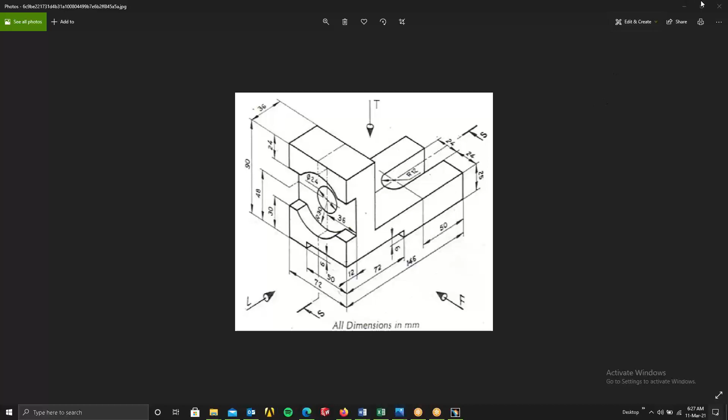Okay, then you can pocket that hole too. Then what else? That's it. Yeah, it is almost done. So it's a good observation. Yeah, you can remove it.

Just minimize the screen so we can straight away take our side plane, sketch, and here we'll do this. So for this, what are the things which are required? We'll first take our center point rectangle and put this rectangle here. Randomly just put it, double click on the dimensions. What is the total height of this? 90 mm.

What is the total width of this? They have given 145 mm. Okay, then what else? I'll take my profile command. I'll just randomly sketch a line like this, and make sure it's vertical, and make sure it is horizontal, so that I don't have to apply any other constraints.

I'll just close this. I'll apply my other constraints. This to this is 25. Enter. Control Z. Here, this first we'll do. This is okay. Height - now this to this...

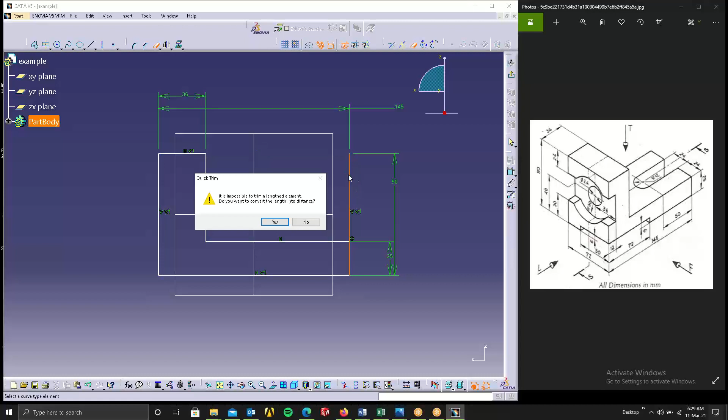Get rid of this. Yes. So the problem is we selected the endpoint, so we'll just do a correction. Delete this, delete this dimension. Select this and select the sides like we first discussed. Select this and select this. Okay, that is done. Then if you want to simplify it even further, we can just use this thing.

Here is the depth - they have 12. So here what I can do is, I can take this, I can just randomly draw a straight line. I'll simplify it as much as possible. Get rid of this. Double click on dimensions. From here to here it is 24. From here to here they have given it as 30.

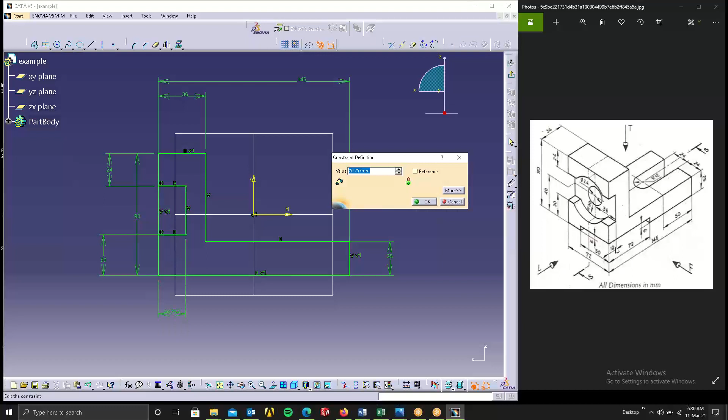Enter. And here this distance they have given us 12, over here 12. Okay, and here this thing you can remove. Okay, what else?

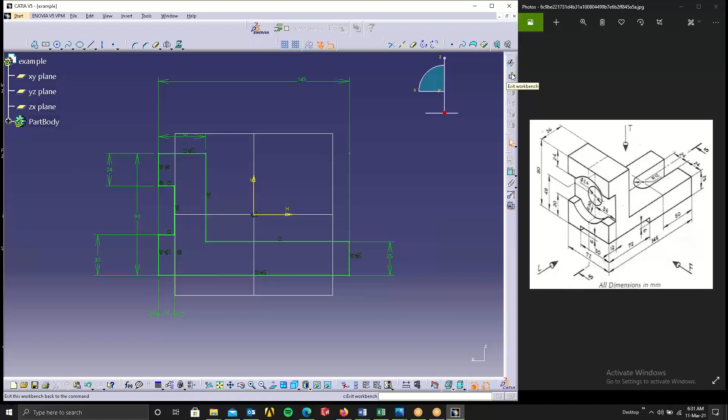So much they have given. Okay, next we'll check if we've missed out anything in this dimension-wise. No, okay, done. So we can just exit the sketch.

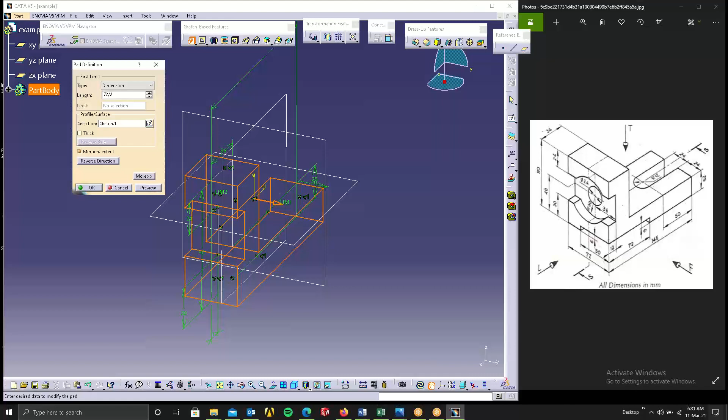Since it's in center, we can pad it, and I can use the mirror command, mirrored extent, so both sides will be exactly in the center position. Total width of this is 72, so I'll give 72 divided by 2, half of the distance, and I'll get this.

Then I'll select my front view, I'll sketch. I'll first create a circle, a random circle. There's one cutout here also, so I'll do that together. You need to minimize the number of steps used, so I'll just randomly create that also.

So double click on the thing for dimension. The diameter of this is given as 24. Enter. And there's one more circle there.

That one I'll put off right now. What is the diameter of that? Diameter of the outer circle is radius 30. Radius 30, you can give here.

Then what else is there? That's all right. So this is at a height of 48. This is at a height of 40. Just check this.

Since it's in center, 45. The height of 45. So this thing they asked is 48.

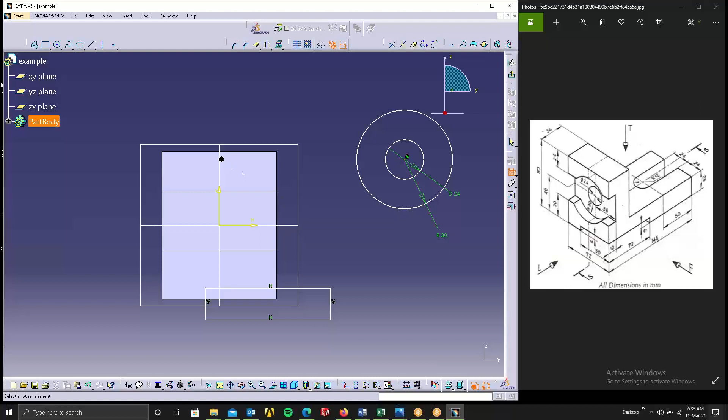Radius 30, this is diameter 24. Enter. So radius 30, diameter 24. Select this and select the center line axis, right click, coincidence. Now select this to the bottom right, bottom. How to get 48. Enter, so that is done.

Then coming to this one, the height is 6, so you can go here and give 6 mm. Enter. And here this distance is 50, so you can select this side wall, select this side wall, give 50, enter, like this. So this is done.

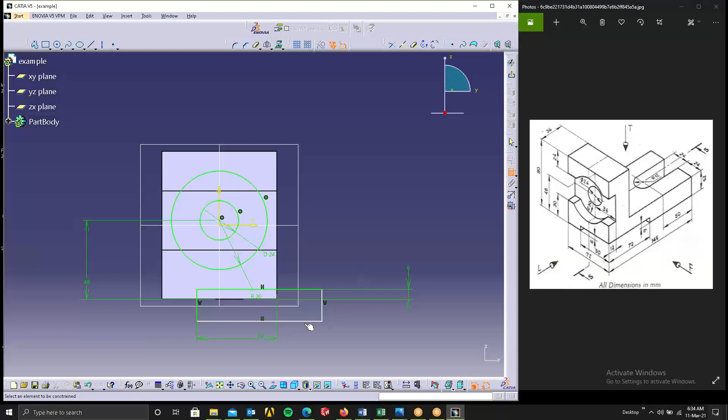This you can give any random value, doesn't matter. Okay, so now this is done. Now you can exit the sketch.

Now over here we can take our multi-pocket which we discussed yesterday. This one is throughout, no big deal. Now this next one is going to a depth of 12, so you can select 12 over here. Then this one is going to a depth of 72 here again, so you can give 72 here, and you can click OK.

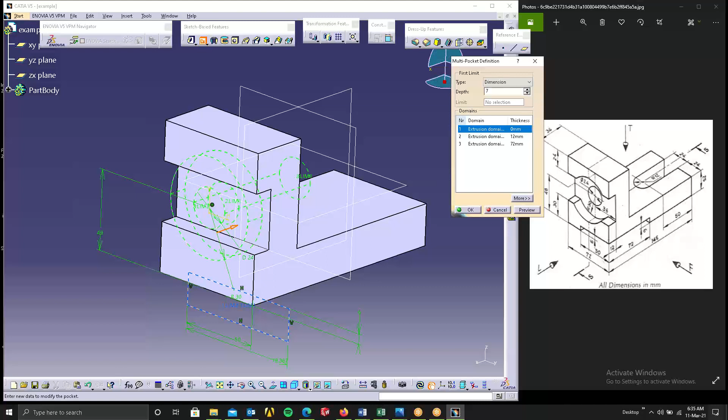So this front part is complete. Now all that remains is the top view. So for the top view, you can select this, you can sketch.

Here, see this thing is rotating in a direction which I don't want. See in this it's like this. Now I want this view like this so that I can draw it here, but when I'm selecting the sketch, it's rotating in the other way around. See, it's rotating in this way. So I don't want this. So how do I change the position of the sketch?

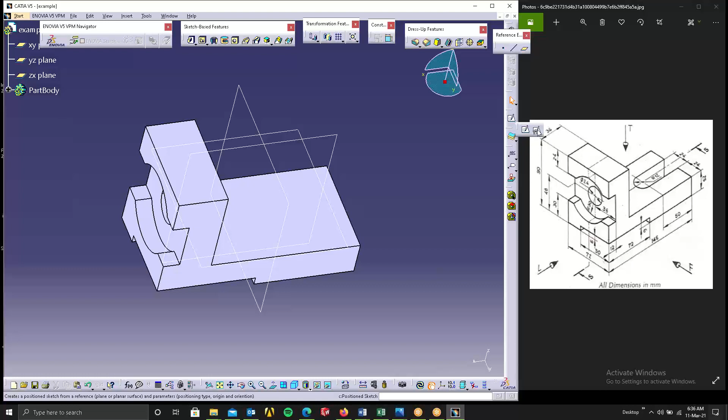For that we have a tool here, position sketch. Okay, position sketch. So I want it in the way I want it. I don't want it to put it here or there, I don't want to get confused. So I'll just select this, I'll select this top view.

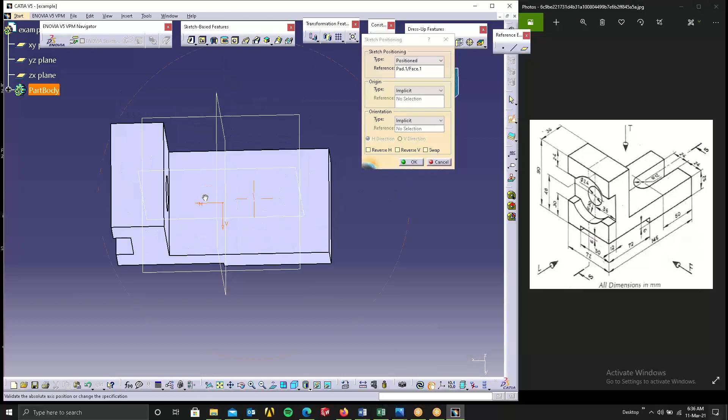Over here we can see vertical is here, horizontal is here. So every time we open the sketch, how is the symbol shown? Vertical and horizontal - vertical means it will be pointed at 90 degrees upwards, and horizontal will be towards the right side. But in this case it's the right opposite. So what we have to do is reverse H, H will come this side, reverse V, V will come here. So this is what we want, this is how it looks.

So I'll click OK. If I click OK, you can see I got it the way I wanted. I'll exit this, I'll show you again.

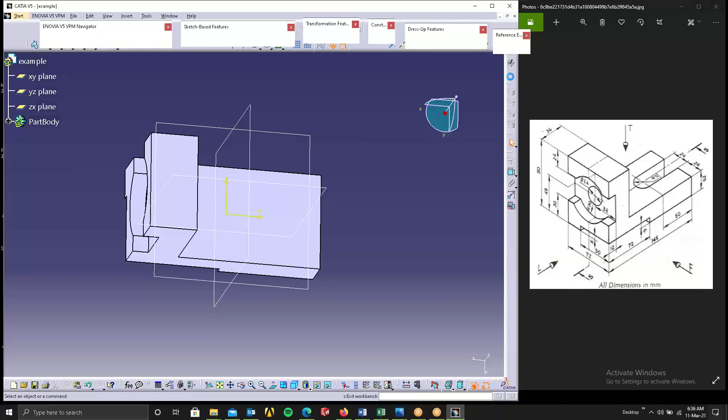So right now I'll take position sketch, I'll select this, I'll select the plane, I want this top plane. Here vertical is down, horizontal is up. I'll reverse H, reverse vertical, I'll click OK. So now I get it the way I want.

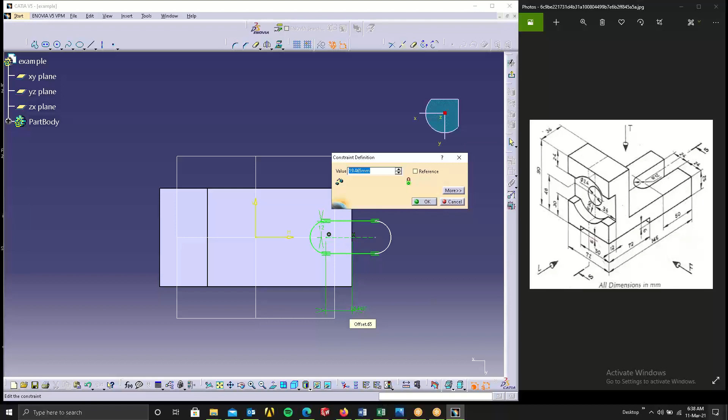Delete this. If you change that automatically, this will change. See, 24 — no need to give any of those dimensions. What else is there? This distance is mandatory. This point, radial point to this edge, is 60. This is important.

Then what else? Anything? Only so much. So you can exit the sketch. I can use normal pocket. You don't want anything else? So in normal pocket, it's already there. Click OK. So your job is done.

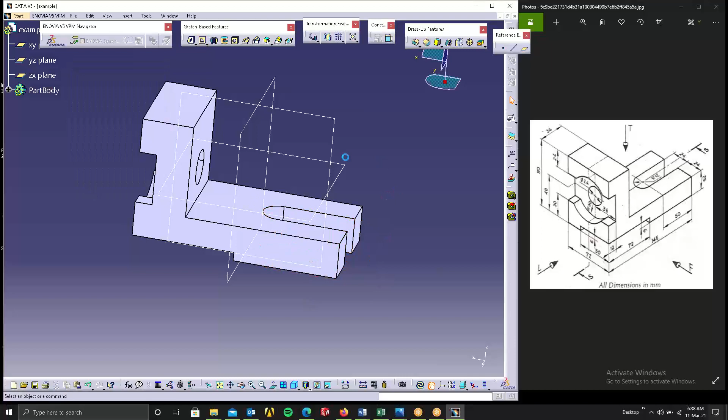Are we missing out anything? Let's check if you're missing out anything. Nope, okay. So it's not that difficult, right?

It looks really difficult, but it wasn't that difficult, right? Vignesh, do you find it difficult now? No, sir. After you explained, it's pretty clear.

So all these models, whatever you're going to do, it's all like this only. Just put some thought into it. What happens is our curiosity, anxiety, and everything kicks in the moment you see something like this. That will directly affect the way you think. So it'll be like, okay, I can't do this, and it'll just close the chapter there and then.

So better to just open up and start. See, you can do it. It's not a big deal. It's a small thing — even a small 10th standard kid can do it. Okay, keep that thought in your mind.

This is not the important thing. The important thing is your understanding about your mechanic industry, understanding about manufacturability, understanding about feasibility, understanding about what tools to use, how to do it, the final product, how it should be done. That is the main important thing in design.

Designing something like this is not a big thing. Anybody can do it. If you teach somebody, they can do it. So don't complicate things. Don't think if I'm good at design, I know everything — it's not at all true.

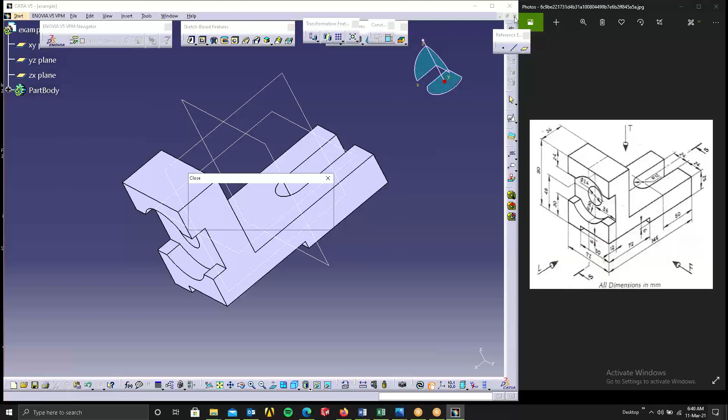We'll do one more example. I'll close this, I'll just open a new part design. I'll give an example. I'll do one more example. So you can study this, take a screenshot of this, and let me know once it's done.

Could you zoom in a little bit? Yeah, sure thing.

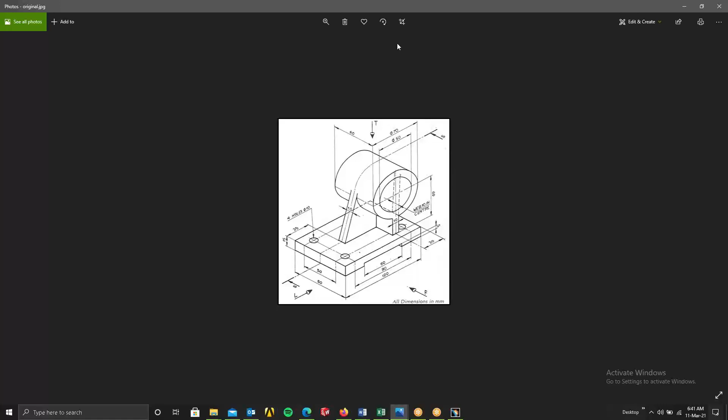If done. I'm done. Yeah, done sir. Done. Done. Yes, yes, yes, yeah. So just take your time, just study this. Tell me how you're going to do this.

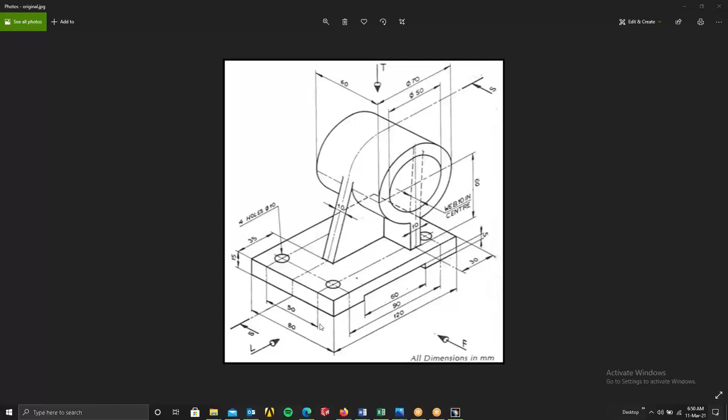So we'll just do this. Let me minimize this. We'll start with this example, starting with this plane. We'll take a normal sketch and do the concentric circle.

What is this? Okay, circle. That's an ellipse. So create a concentric circle, and create this small rectangle which is passing here.

Double click on this, I'll show you. I told you, you don't have to go to the constraints, you can do it here only. Select the two edges, right click, allow symmetry line, select the vertical line. So you can apply symmetry straight away without breaking your head.

The width of this is 10 mm. If you do this, just delete it, right click and delete. Don't press escape, because then you have to go here again. So, 10, enter.

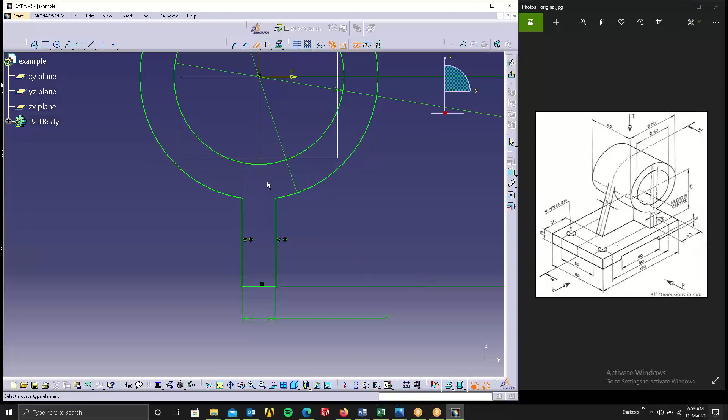Okay, now this is done. The problem with this is we'll touch this. If it's not touching, you could have straight away done this. What I'll do is, there's one more command, let's remove this. We have here isolate. This thing is the profile feature isolate, so what you can do is select these many elements and click OK, and this will become isolated. I shouldn't have taught you this now, but we'll just check.

Okay, this thing. Now again our dimensions, select this and select this, right click, allow symmetry line, select the vertical line. Dimension this, 120, enter. And what else do we have? This one is how much, what is the thickness? 15, enter.

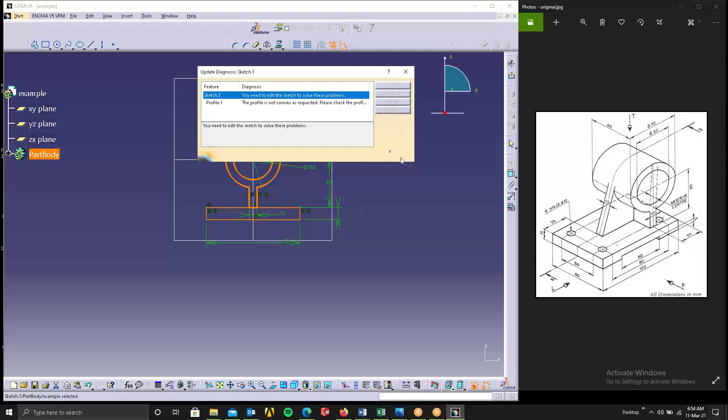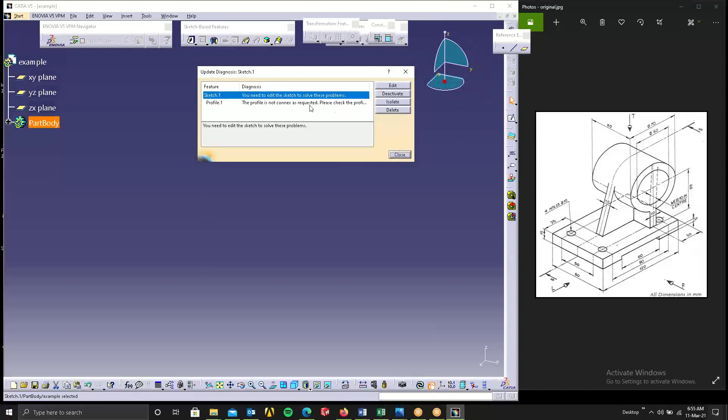15, we'll just check this once. Also, I doubt it, yeah, edit, close. Select this, select this, isolate, okay, but we're getting issues with that. Control Z, Control Z.

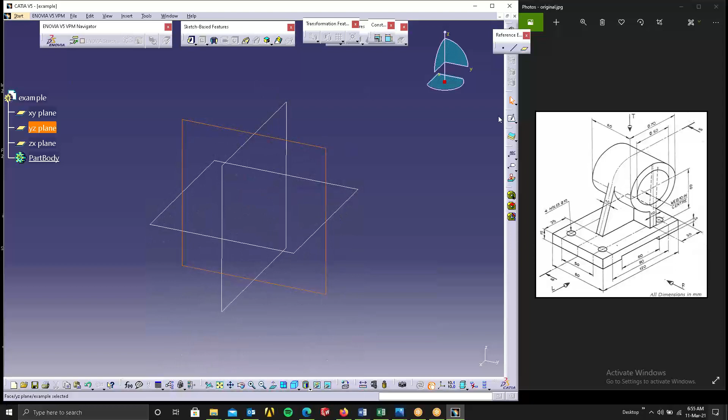We got some bug there, it's gone. So we'll just do it again. You should be very careful while using Catia, you don't want double work. That's why it's important to check before proceeding.

A lot of things like this will occur when you're doing simple models. So this is 70, enter. Now this is 50. And the other part, the small part, double click on dimensions.

This is 10, enter. Right click, allow symmetry line, select the symmetry line, and the height part. This base element is 60, enter. Double click on trim this, trim this, trim this, and trim this. So this is our part. Now you can just exit this.

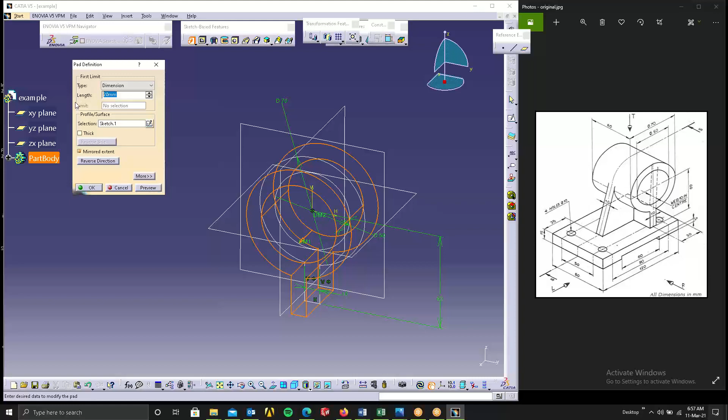Here we can pad it to a distance, take mirror command. We can pad it to a distance of how much? 60, so we can give 30. Enter. Okay, this is done. 30 is done. Now select this part.

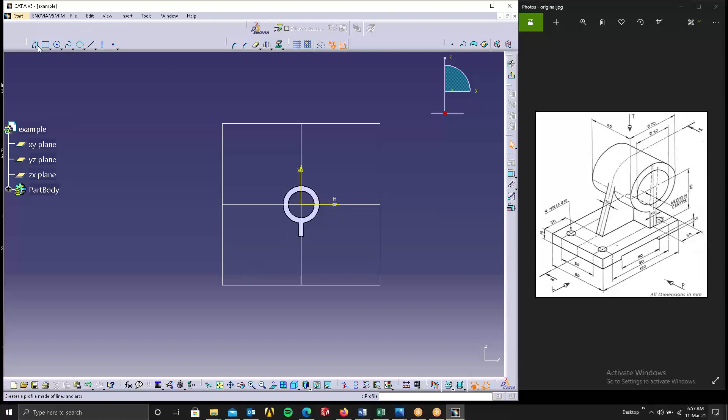We'll sketch here, we'll sketch this part. Will it pad from 60? I don't get where it is mentioned 60. See here it is given 60. Oh, okay.

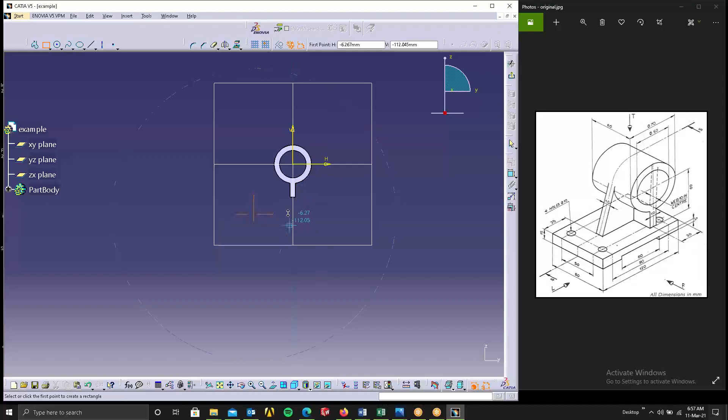Normal view, over here we can just do this. We select the zoom command. From this point just randomly create a rectangle. Here one more rectangle you create randomly, don't have to waste time on this.

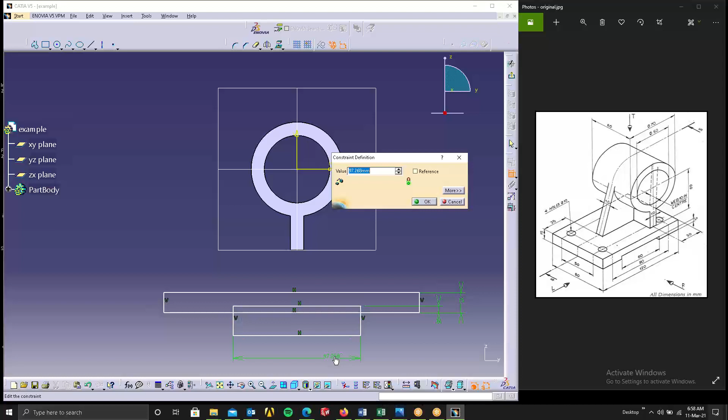Double click on dimensions. This one has a thickness of 15. This is at a distance of 5. Okay. Then what else you have? This at a distance of 60. Okay, 60.

This is right click, allow symmetry line. Select this, let's do symmetry. What else do we need? 120, 90, everything's done. Thickness is given. This width we haven't specified yet. Select the sides. Total length is 120. Enter.

Select this, select this, allow symmetry line. Select the center axis. Okay. Select this, select the base edge. Zoom in, select this base edge and apply constraint. Coincidence. Okay, just check this once.

What distance is given? Here it is given 30 from the center of the axis. So we can't give it since we applied symmetry. So that symmetry feature we have to get rid of. Come to this, go to sketch. Here we have constraints, so we have parallelism. Symmetry, get rid of symmetry. Just delete this from here and delete the symmetry from here. Okay, so I was showing you that, it's much more convenient.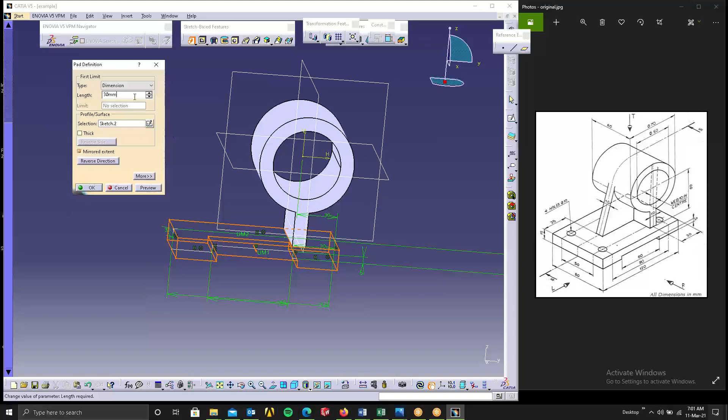You can just double click on trim, get rid of this, get rid of this, get rid of this, and get rid of this. So many things you get rid of. Exit the sketch. Now use pad command, turn on mirror option. Here they have given how much? 60, so here you give 30. Enter, so the base is done.

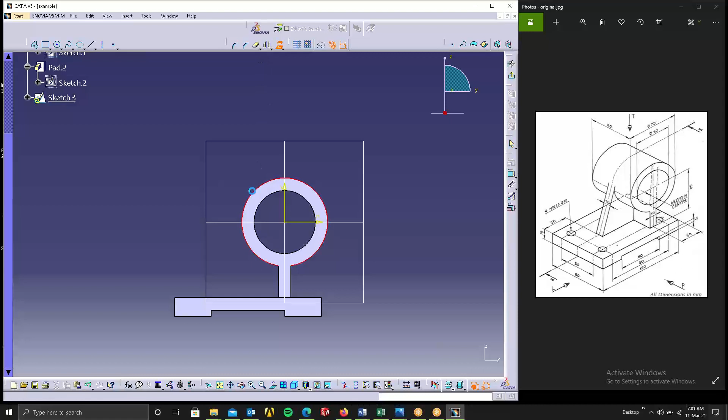So almost it's complete, so we can just select this plane, center plane again. Sketch on this, so here take project 3D. Select the circle, and then here we have this rib, it is at a distance of 35. So random axis, okay, random thing you create. Then select dimensions, the dimensions you do the rest. First thing is first.

First, yeah, tangency. Select these two elements, apply tangency over there. Then this thing is coincident to this. Coincidence, it's turned out double click, I hope it's double clicked. So select this, right click, coincidence. Select this and select this, and this. It's again gone, double click.

Select this and select this. Here how much we have? 35, 35, okay. Double click on trim. Before double clicking on this, project 3D element. This you select, project 3D element. This line also you select. Okay, then double click on trim.

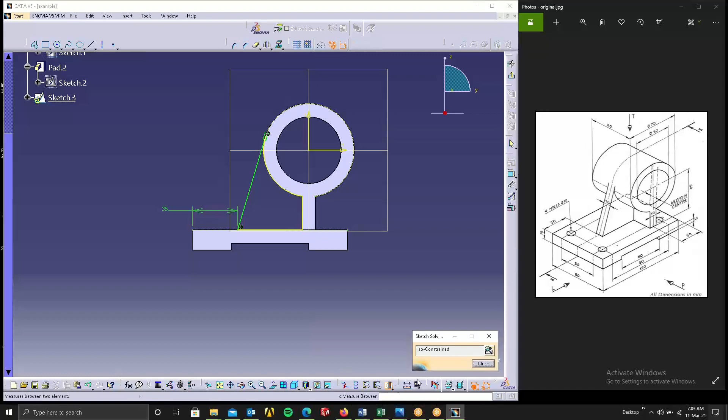Get rid of this, get rid of this, get rid of this, get rid of this. So everything you get rid of, almost anything that is covering this. We need this as a complete thing, complete connected lines. If there are any gaps anywhere, then we won't get it. So just check this, any gaps anywhere, just go to geometry. So everything is closed. Yeah, so no big deal.

So we'll get it, you can exit this and pad it to a distance of 10. Not 10, sorry, 5. Mirror 5, yeah, mirror command. So when you use mirror, just give the half value. Then select the top plane, sketch. Okay, just create the circles. We have one circle here. Oh, sorry.

And here we have one more circle. Double click on dimensions. The four holes are diameter 10, as given here. So this is diameter 10. Enter. This is also diameter 10. Enter. The center of these two are not coincident.

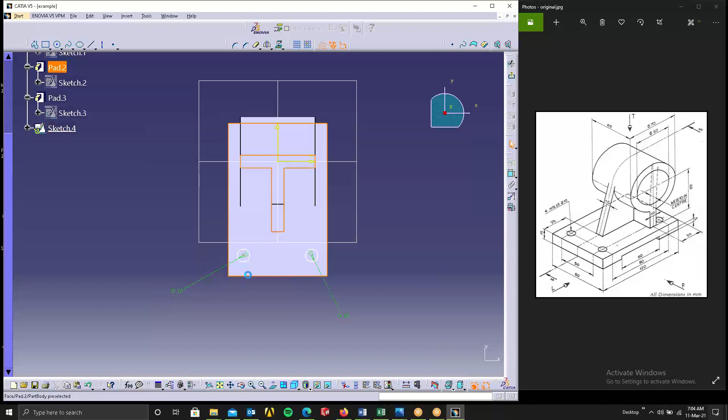Horizontal, I can't give this, so we will do something else. First, constrain this, we can do vertical. That is in SolidWorks, other software. In Catia, we have a problem with that. So we can just give them a vertical measure, no big deal. I was trying to do it using constraint.

Just normally do it. So double click on dimensions. This too, this is 120. Enter. 120, no, that's 90. 90. That's 90. Okay, so make this 90. Enter. Then what we will do is...

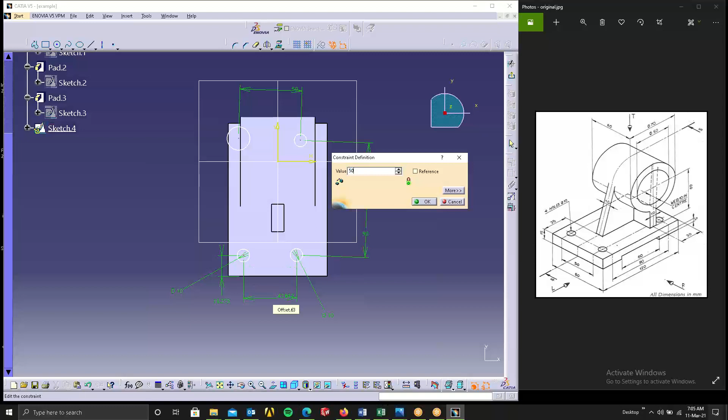Distance of this is 50. So these two are at a distance of 50. Give 50 here. Enter. Here also you give 50. Enter. Here you give again 90. Enter. So now this and this, right click, apply symmetry line.

Select the vertical axis. This and this, right click, apply symmetry line. Select the vertical axis, and then here, what else we have? This diameter, what is this diameter? 10. Enter. This diameter is also 10.

Enter. So what is blocking this? I think two measurements, just delete this. See, this is at an inclined angle, this is not what we want, this is a slope. Yeah, this is straight, that is slope. So every time you're giving dimensions, just make sure you select the distance and right click horizontal and vertical measurement, or else it will become a slope.

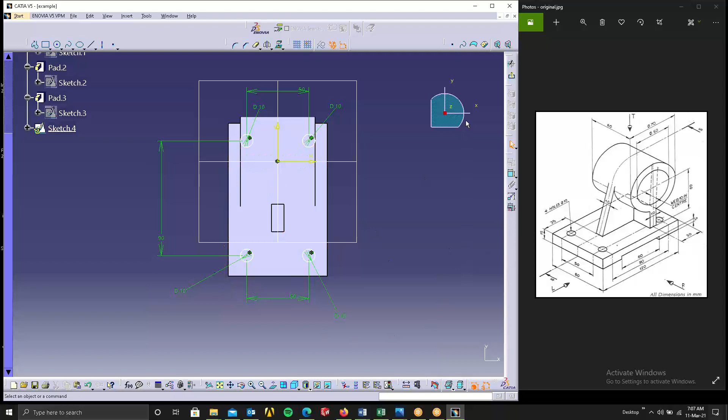So this is done, everything is done. Here some 16 something is there, just get rid of this. So all the dimensions are correct. So you can just exit the sketch. You can just pocket it. Take the limit, pull it down. Click OK. So anything missed out?

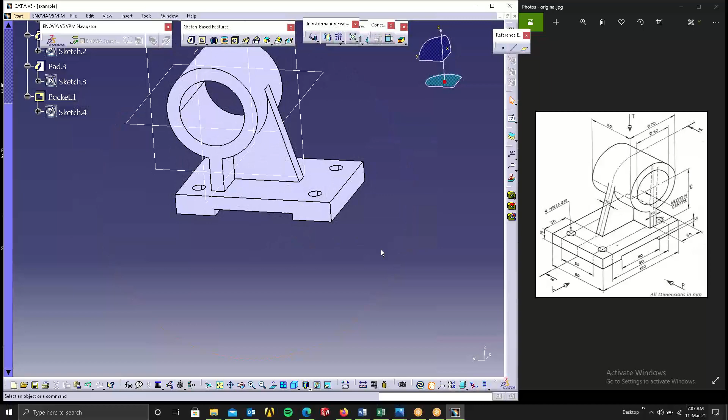I think we are good. So Vignesh, have you understood this? Yes sir, yes. Is it difficult?

See, the thing is, we could have done it in one shot itself. This one element, this one element, this one element, we could have done it in one shot. But since we have some bugs, using multi-pocket, we could have done that.

Okay, so you can see, one plane you select this center plane for this. Second, again this plane you select and create this. Sorry, first you create this, then you create this, then you create this. Only three steps, then the whole thing, four steps you could do this. Understood, right? Yes sir. So what else do we have?

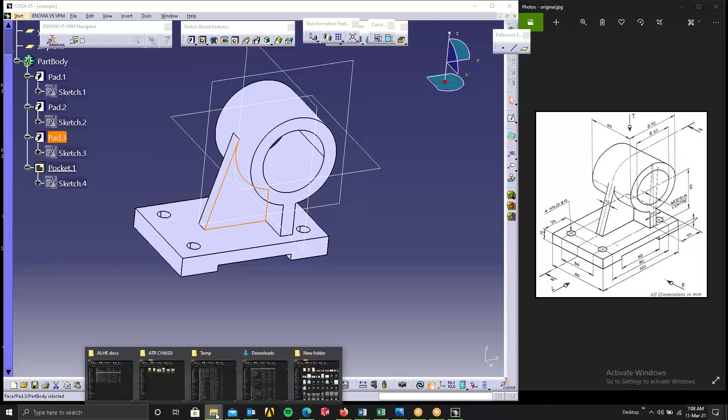Any other examples? This is rib and slot, you have to use. This is done. This same thing.

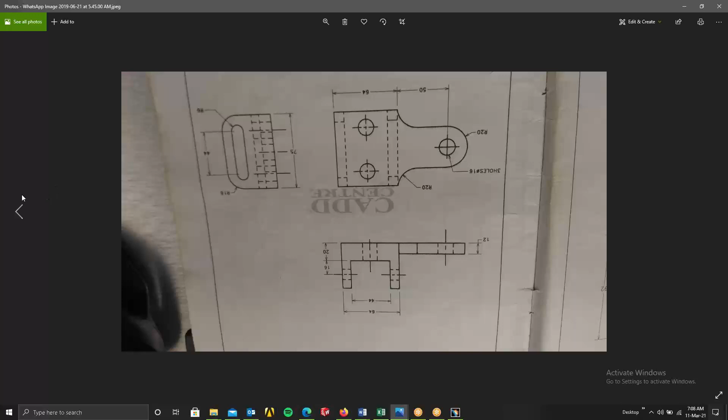So you can take this screenshot. Once you're done, you can see it done. Done, okay. So done sir, all these things that we have, whatever we are doing now, all those things you should do as your assignment. Okay, let me be clear with that. Okay sir.

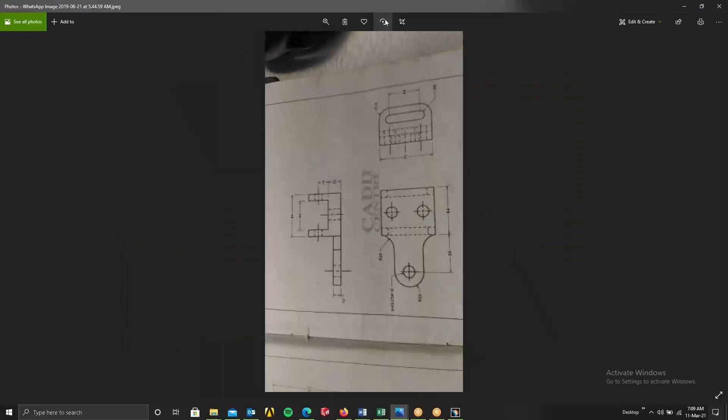So now, okay sorry. So just study this and tell me how you're going to do this. Here we have three different views of the same object, three different views.

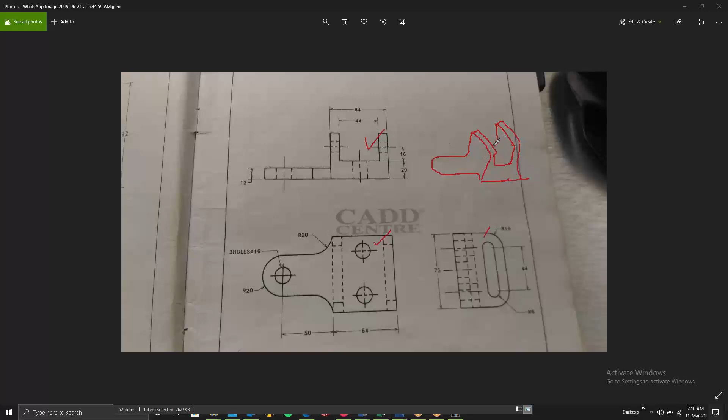There's some slot here. Something like this. Here we have holes. Okay, that would make it the first one as front view. So all that requires is you should be able to imagine this.

So most probably what they'll do is they'll put something here, some rod or something. Again, they'll put some rod here. From here, they'll tighten it. Here some nut will be there like this. There'll be a hole. Here they'll put the nut. This will be the bolt. Something slot is there so that movement is not restricted. Something like that. And from here they have given two holes.

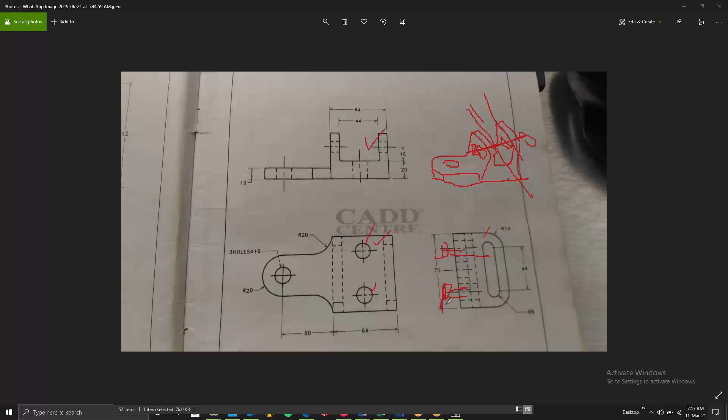Slot means it can move a little. Here, if they've given two holes like this, then that is to fix it in place. From the bottom, they'll put the nut. From here they'll put the bolt, and when they tighten it, this thing will get pushed upwards. So this will hold this thing in place. This will lock this axial movement. This will lock its vertical movement. So you're constraining its movement.

So that is what they are trying to do with this product. Something like this. Understood? Or else what the thing will be is a door lock, something like that. So this is the main concept here. Something like that you have to imagine what is going to happen. So this is a product. Now you're able to visualize it, right? How it's going to look.

Yeah, yeah, it's like this. So this is a product. So, just take your notebook and draw it.

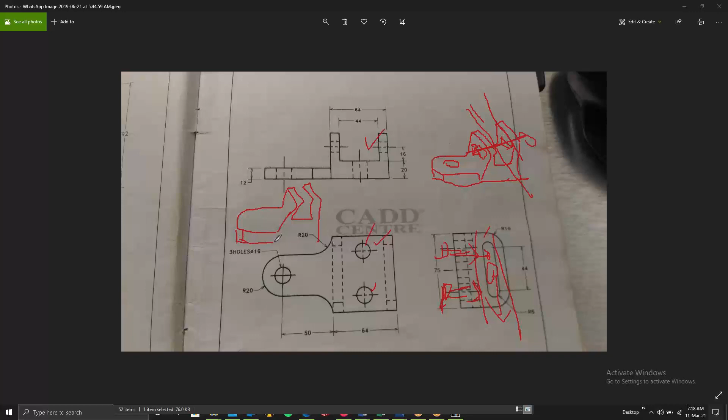That is what I used to do. I used to just randomly draw sketches so as to get a clear picture of what it is. So that's much more convenient. Okay, so something like this.

It's coming. Here are the slots. Here also the slot is there. Here are the holes. Here you have the hole. Okay, is that clear? Yeah, so just tell me how you're going to do these runs.

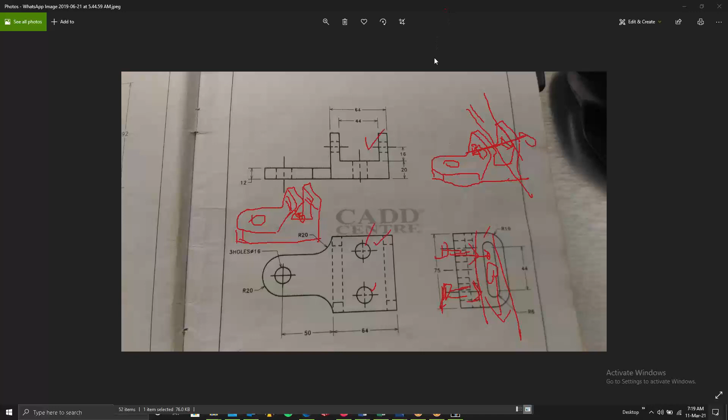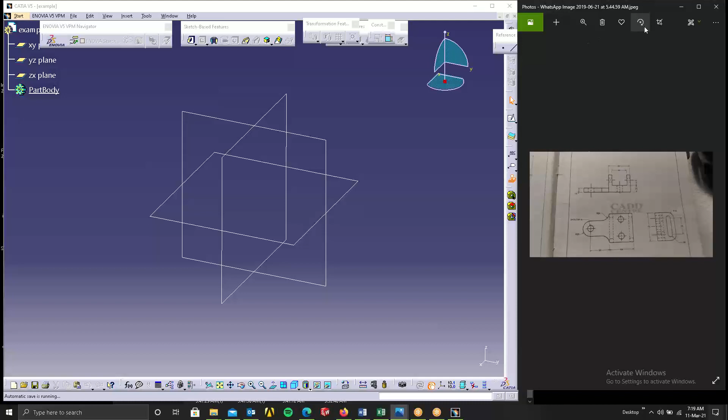We could just start with the front view. Yeah, we'll do this. Let's rotate this. Yeah, this is much more convenient, right? Let's start off with the side view. Let's take this. I'll take the front view itself. Yeah, front view I'll take. Anything is fine. So I'll just take this, our main ally, our center point rectangle.

Just create a rectangle like this, or like that, or like that, or like this. Take 2 point rectangle, place it here. Double click on dimensions. Straight away, right click, allow symmetry line, center axis. So next is what? Dimension still on. This one is height, they have not given.

Now, what is the height of this body? What is the height of this? Here we know 20 plus 16. Over here we can see that this is the same thing, right? 16 till the center. See, this is the center line. So the center line of this elongated hole, that distance is 36.

20 plus 16. So from the center line, this radius they have given 16. So 36 plus 16 is how much? 36 plus 16 is 52. So 52 is the height, total height. Understood, right? 16 they have given here, that's the radius, so that we have to add. Then what else we have?

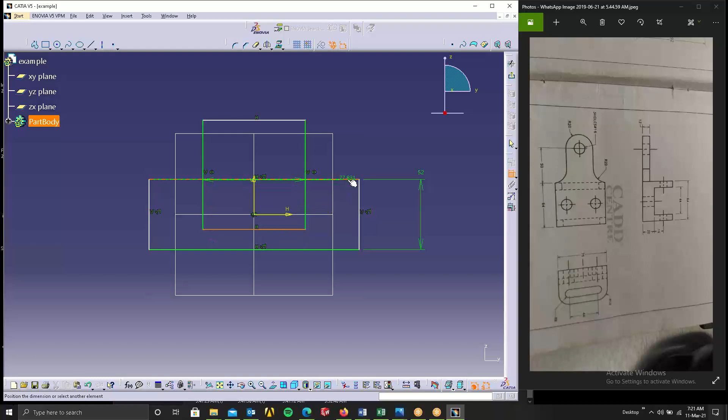Now dimensions, double click, select this, double click on this 64, enter. Where's the other one, smaller? Yeah, this thing is 44, enter. Okay, double click on erase, get rid of this, get rid of this, get rid of this, get rid of this. Anything else? Can we do any other thing here? No, right? So we'll exit this.

We'll give a pad. So what is the thickness of this? 64. 64 means not 64, here 75. 75 means 75 divided by 2. Why 75? Because see, this is the thing, it's getting extruded to a distance. See, this is what we have drawn, it's getting extruded till here. That distance they have given here 75, so 75 divided by 2, I got this.

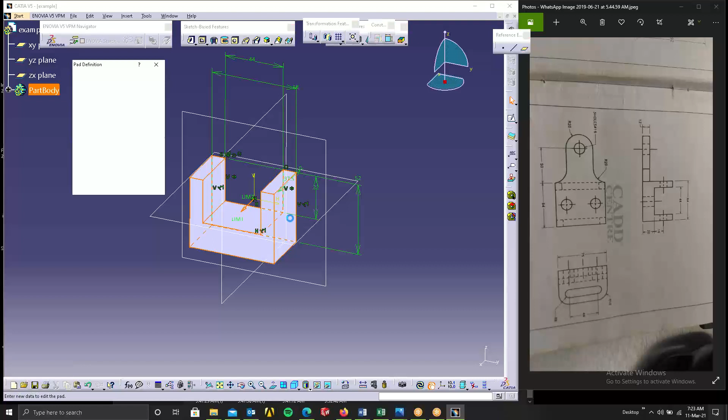Okay, I didn't select mirror command. Select mirror command, click OK. Now it's done. Now what do we have in place? These slots and everything I can do later, it's not a big deal.

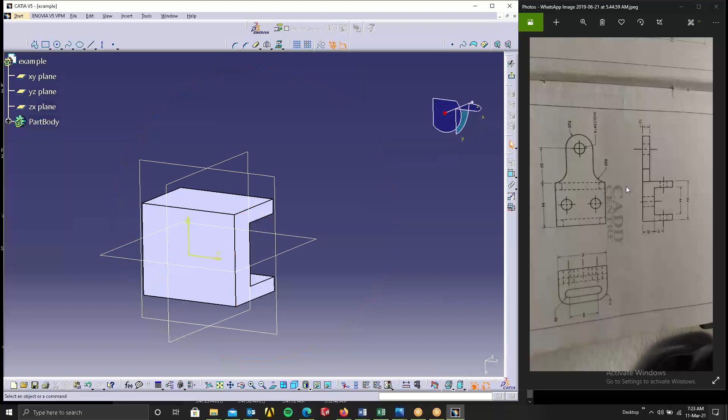Now we have to select this base, then sketch. Again, always remember the direction, so now just check this, don't straight away start doing it. Check first. So it's like this, our requirement is like this, right? It should be like this as per design. This part will come in front of this. So if we do it here, it's wrong. So that's why take position sketch.

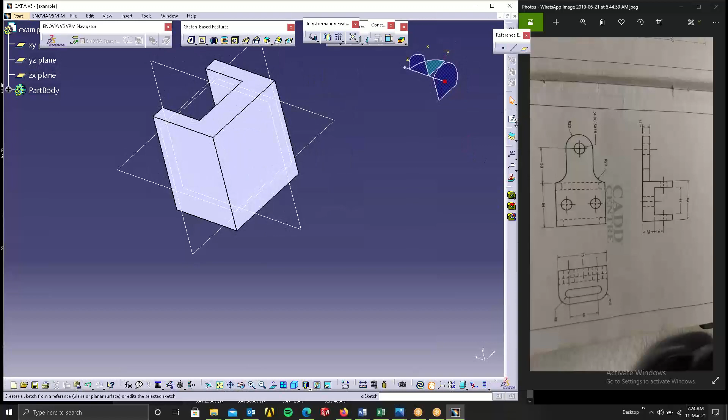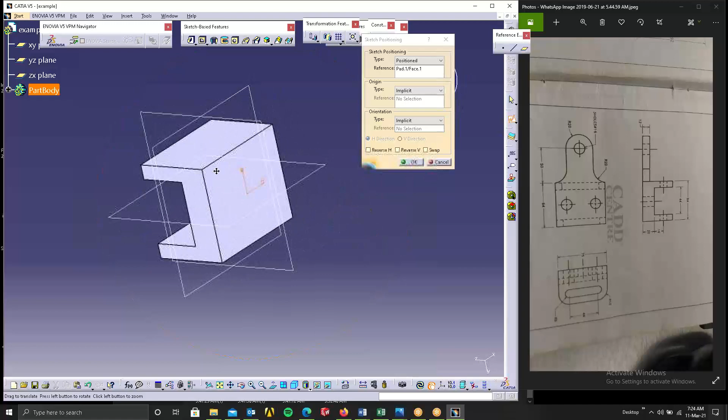Over here, select this position sketch. So now just select this plane. So this is vertical horizontal, meaning this will come vertical here and horizontal here, like this will come. So I don't want this, I want this to be like this. This face should be this side. So what I'll do is, if I reverse horizontal also, it's not right, I want it like this. I want the model to be like this, right?

Because you can see here, this is coming here, right? This drawing is coming here. This is the rectangular thing, dotted lines, and this protrusion is coming right in front of it. So I want it like that, so if I reverse H, it's going up again, it's not at all what I want, it's going here. So it's better, see there is an option called swap. So horizontal will go here and vertical will come here. So swap it. You can see vertical came down, horizontal is here.

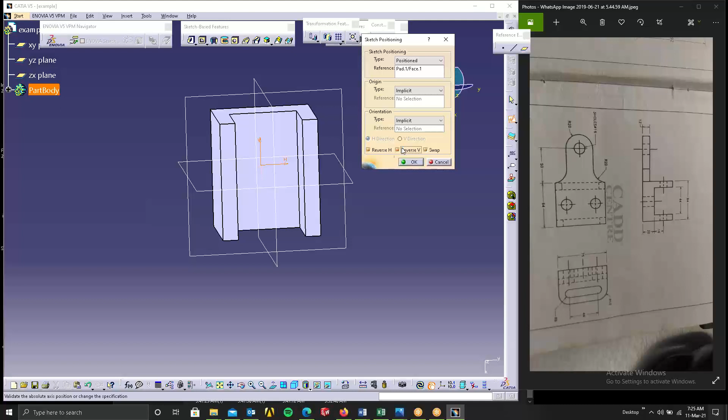So now I can reverse it. I can reverse vertical. Now we got it exactly the way we want. So click OK. Now here we can just do this, we have this thing. Double click on circle. Here at the center line we have two circles. Then what else we have in this? Here it's coming in, meeting at this point. Take project 3D element, select this.

Okay, then anything else, they have given 50 from this. So before that we'll just join this, no need to worry about that. So we'll just take line, just tangent to line. We'll just check if it's done, then work is easy, no need to control the straight lines. So straight line import... take normal line from here, tangent to this, select this.

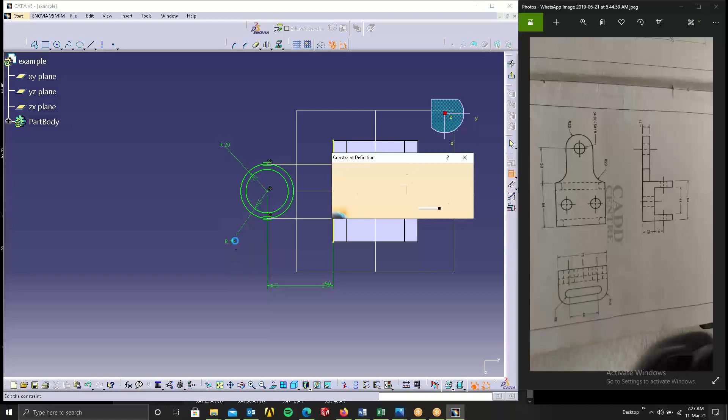Tangent to this, okay. Now double click on dimensions, from here to here it is 50. Okay, this one's radius is 20, and this one's diameter is 16. Double click on this, change this to diameter 16, and trim this element off. Okay, trim this off. This is extra line, this is extra line.

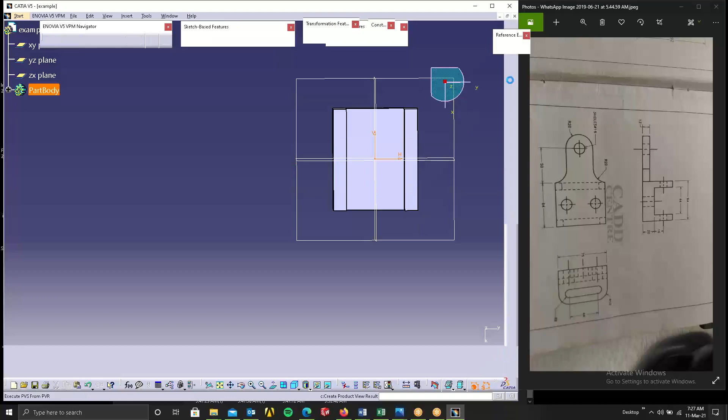Okay, now we'll just constrain this a little more, this and this. Right click, allow symmetry line with respect to this. There is symmetry, still this is not constrained, I wonder why. We can do is we can give this distance. Yeah, done. So we can exit this and pad it to a distance, thickness is 12, so we can give thickness as 12.

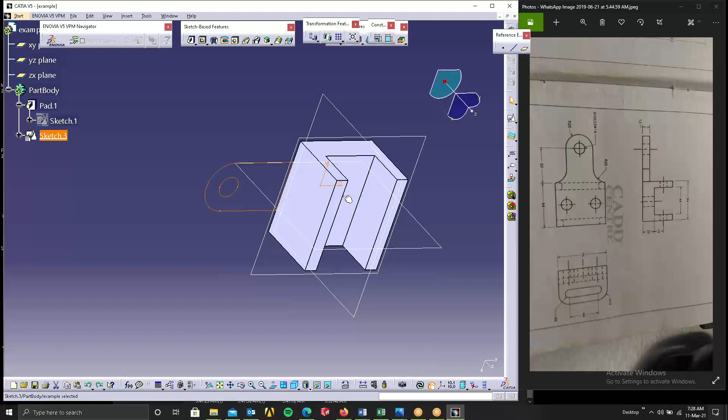So one more thing, if we knew how to use fillet command, we could straight away use fillet. So since we don't know the fillet command, what I'm going to do is fillet it right here itself. Here only you have to fillet it. So control Z, control Z, control Z. Oh shit, control Y, control Y, control Z.

Just double click on this to edit it. Yeah, so what you have to do is just extend this. You extend this. Go in here.

Take the fillet command. Select this and select this. Here, how much is it coming? They have asked radius 20. So here they have asked radius 20. Enter.

So here what I can do is I can just straight away select a line. Here, however it is, I'll select this. I'll select this. I'll just delete this first. Delete. I'll select this, I'll select this. I'll take my mirror command out.

I'll select the center axis. I'll just put it here. I'll take one straight line, or else I'll just take project 3D element. I'll select this, or else pivot. I'll just take a line, a line adjacent to this.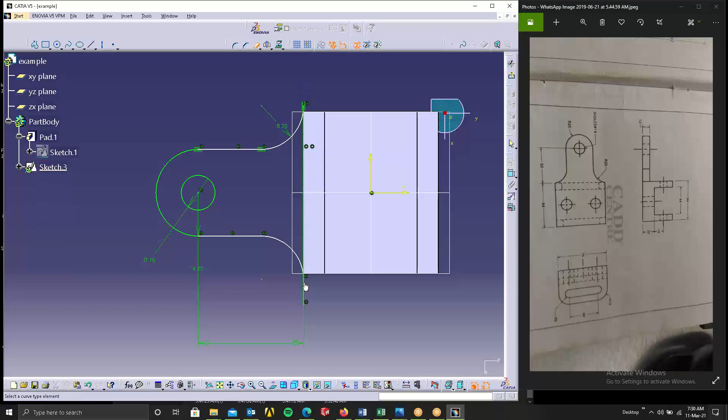Double click on trim. Double click on this, get rid of this. Get rid of this, get rid of this, get rid of this. Here, just check what it is. It's not intersecting enough, so take project 3D element.

Select this. Normal view. Project 3D element. Select this. Take extend. Extend this, take extend. Extend this, take erase.

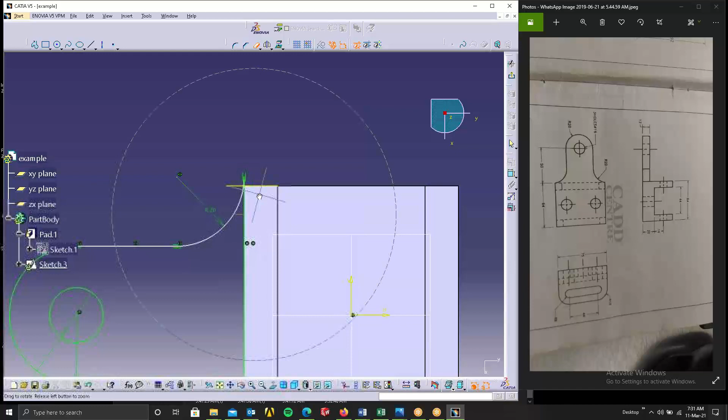Double click on erase. So just delete this, get rid of this. Just get rid of this. Get rid of this, get rid of this. Get rid of this. Okay.

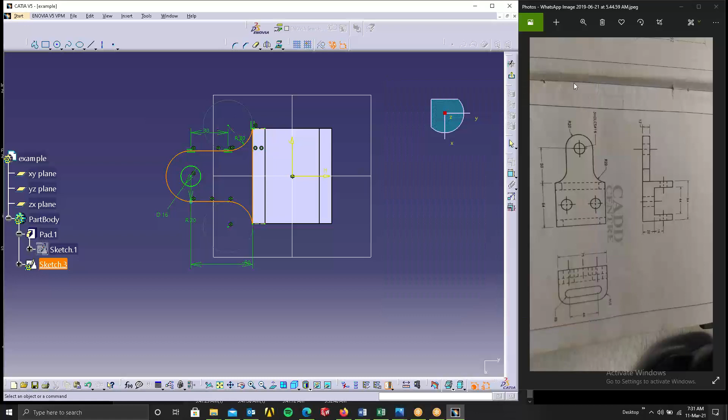Now just check if any opening is there. So that we'll just constrain this. Double click on this, select this. Okay. Now just check if any opening is there. Geometry - it's closed, it's closed. So no gaps, so exit this.

So now you can just pad it to a distance of 12. Enter. So this is done. And what else is remaining? This thing is there, so just select this side. So check this vertical horizontal. It's okay, so click OK.

So here we have this elongated hole. Straight away I'll put that elongated hole. Then I have these fillets here. So what I'll do is I'll take project 3D element. I'll select these two things. Project 3D element here, this also select. Then I'll use my fillet command.

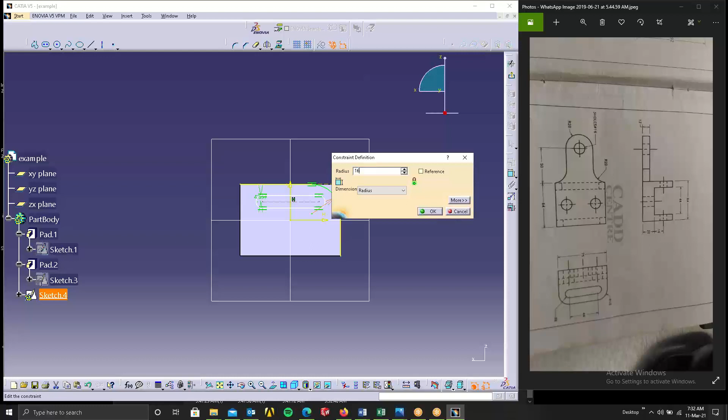Again, this thing can be done easily using fillet if you knew how to use the fillet command. So since we have not gone there, we are not using it. So the diameter of this, radius of this, is 16. So next is what?

Take the profile command. You select this endpoint. Here you put, and this also you select. Okay, this is done.

Okay, now click on dimensions. Before that, yeah, whatever, we'll just select this. We'll select this, right click, allow symmetry line. Select the vertical line, just uncheck this. Here we have this value.

Here we have radius 6. Enter. Here we have 44. Enter. And here we can see 16, what we are discussing.

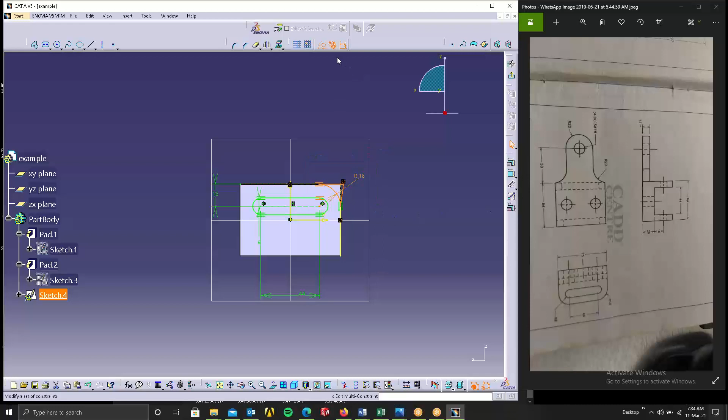So same thing I can do from here to the topmost edge dimension. Here you can give 16, enter, and this particular element you can just straight away mirror it. You don't have to waste your time repeating it. Select this, Control Z, take mirror command, select the vertical axis, and you can just exit the sketch.

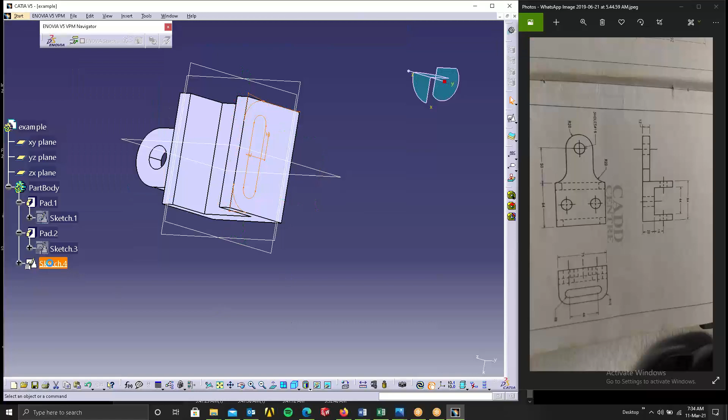Here you can take pocket. Yes, some geometry - I think some geometry, some gap is there. So just double click on sketch, there is one line, one line where - this one, the vertical one on the right side.

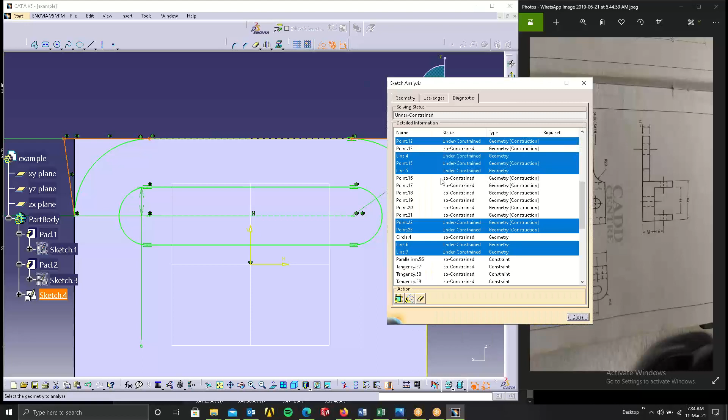You can scroll down. Yeah, that one. That one, yes. Just delete it. Close, exit this.

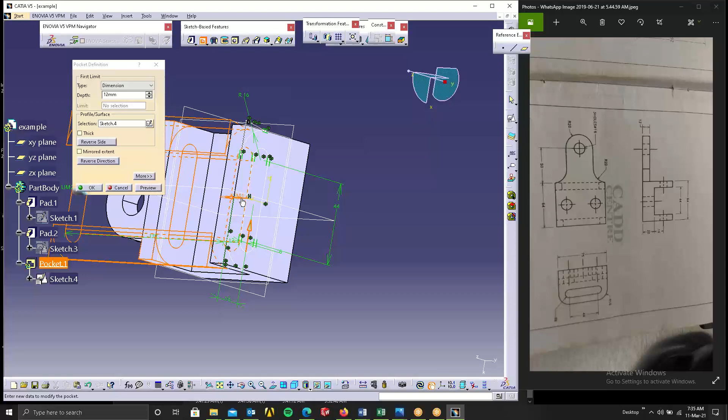Okay, now pocket it. Just drag it, you don't have to worry about it. Okay, just drag it out and click OK.

Go sketch here. It doesn't matter, so here we'll just put those two circles. One circle here and one more circle here. Double click on dimensions. Both are diameter 10, and 10 here, and this is also 10 here.

These two things are allowed symmetry to this, and the distance is how much? It's like this, so here we can see they are given 44. See the center line - this is the center line of the circle. This is center line of the circle. Center line is adjacent to this distance. So dimension here too - here it is, half of that, 22, enter.

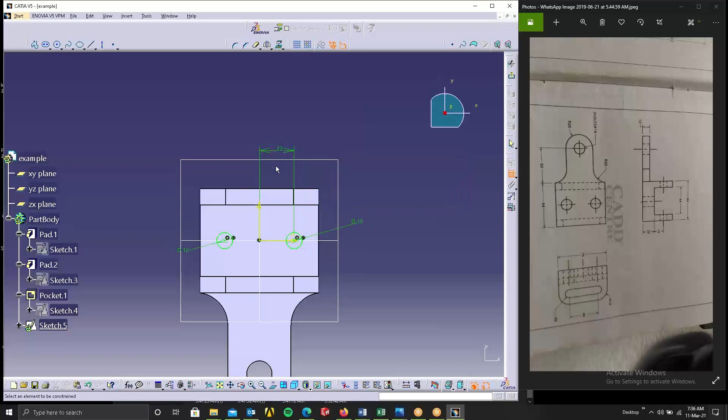Okay, that's it. Now I can just exit this. I can do pocket in reverse direction. Click OK.

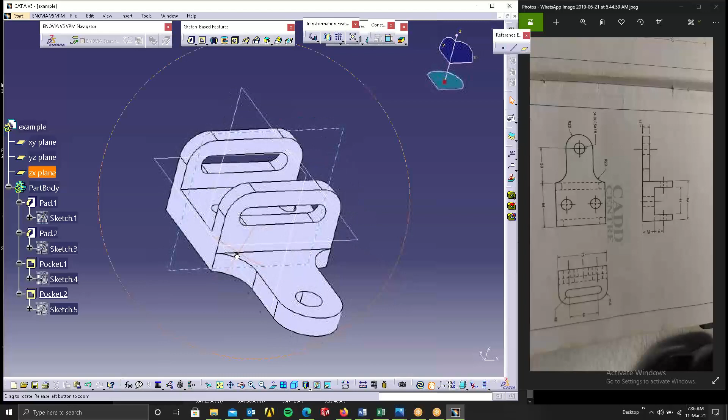Are we missing out anything? No. Vignesh, have you understood this? Yes, sir. Yeah, so do these things as assignments.